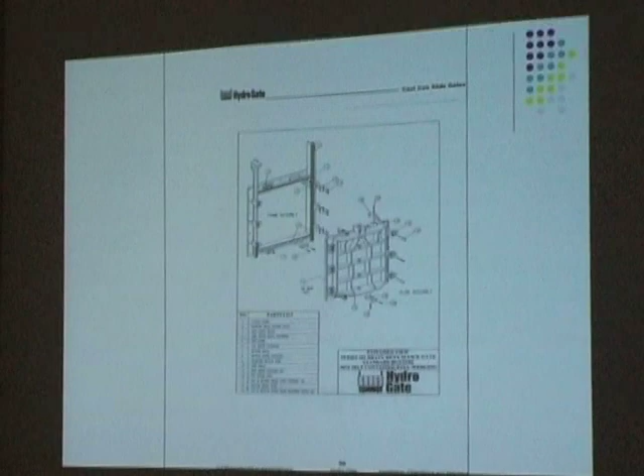There's a little parts list here. This isn't specific to a particular unit, it's more of the lingo and terminology covering what each part is. This is more for the Whipps and stuff.

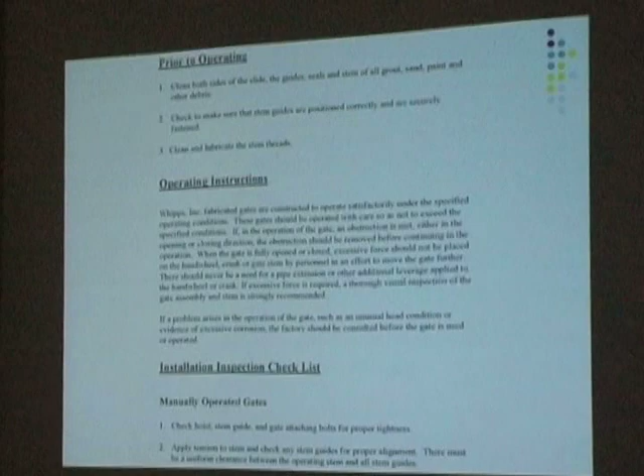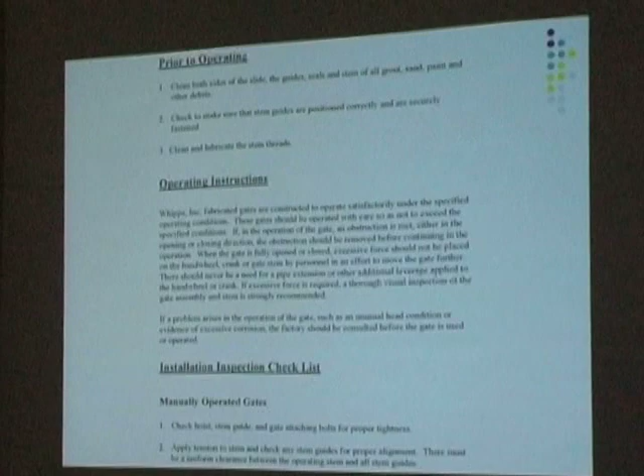What I've said truly applies to Whipps and slide gates as well. There's no real difference in the operation. It has a stop collar, it has a hoist, same as the others.

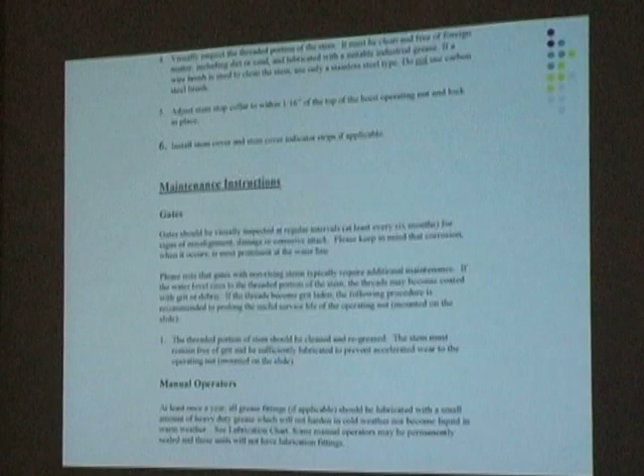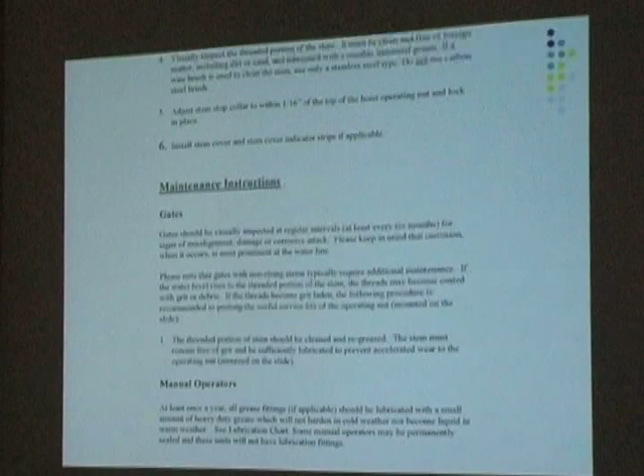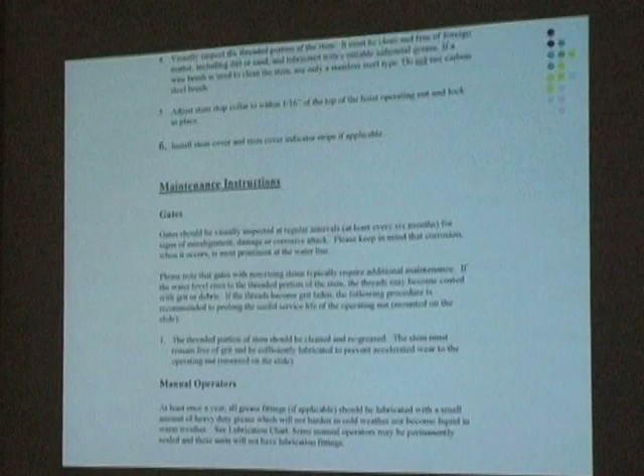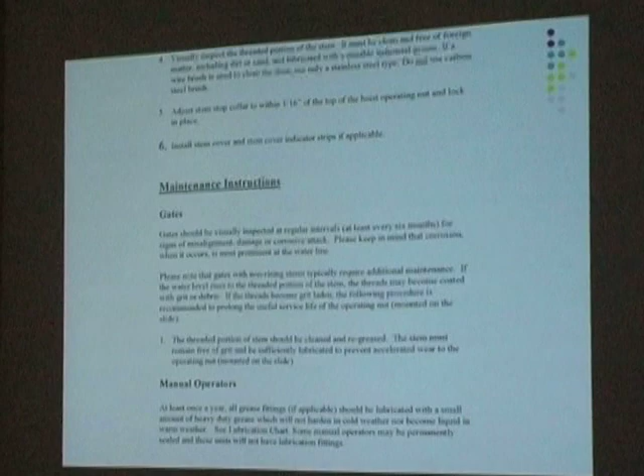You need to set the stop collar properly and grease the stem. One of the most common reasons a fabricated slide gate will leak excessively is when the contractor gets grout on the plastic seats, which damages them so they won't seal. We always say please clean it properly, because most fabricated gates are mounted on a pad of grout, so it's more common to get grout on that than on a cast iron gate, which goes on a wall. That's something we need to be aware of, and I'll check that out.

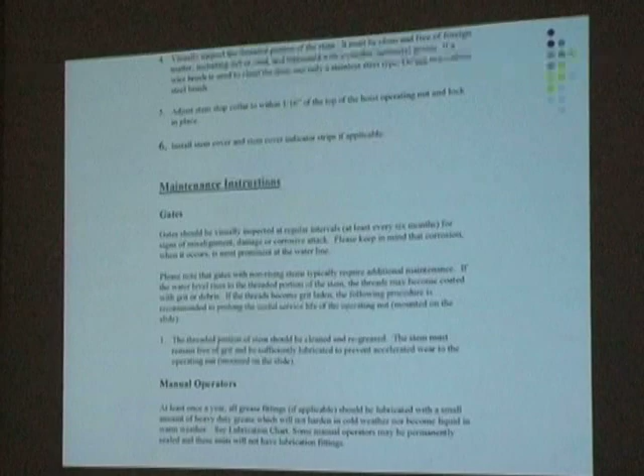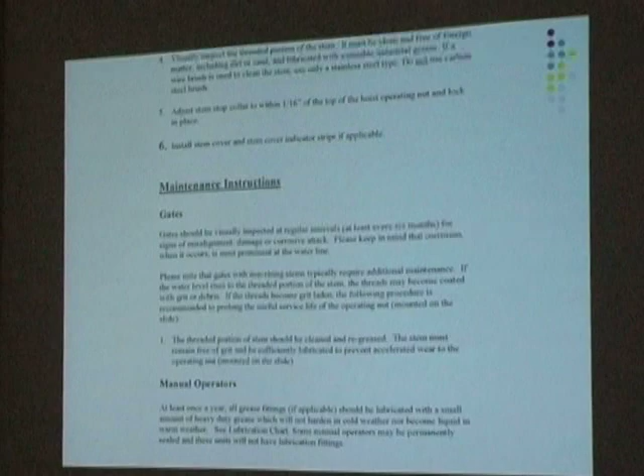Manual operators have a little grease fitting. They recommend greasing once a year. Don't overdo it - don't keep pumping the grease gun until you blow the rubber O-ring seal out of the bottom. Just a few pumps will be sufficient.

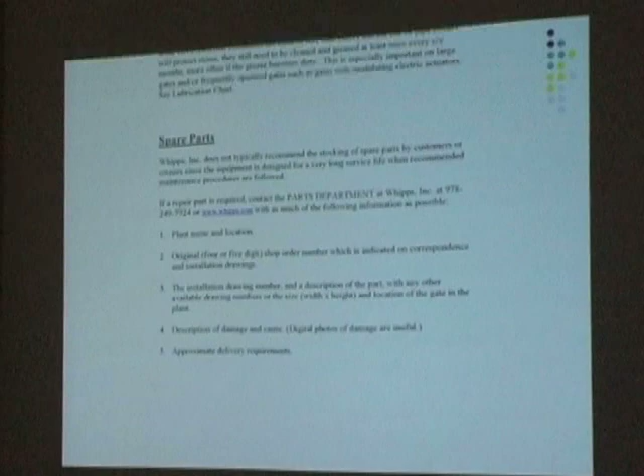Same thing with these - really no spare parts needed. Now, I don't know how you folks are set up - do you have different people who work on the electric operators versus the maintenance people or electricians?

For the electric operators, we're going to set the limit switch and the torque switch. On the EIM actuators you have here, they're all mechanical torque switches and mechanical limit switches. Once we set it, they shouldn't change, unless the stem has been replaced. But if things stay as they are today, you don't need to change the limit switch. Maybe the torque switch might need some fine adjustment, but not the limit switches. Limit switches are positioned mechanically, and even electronic ones like Limitorque setups shouldn't really need changing. But EIM here will be mechanical and should be set.

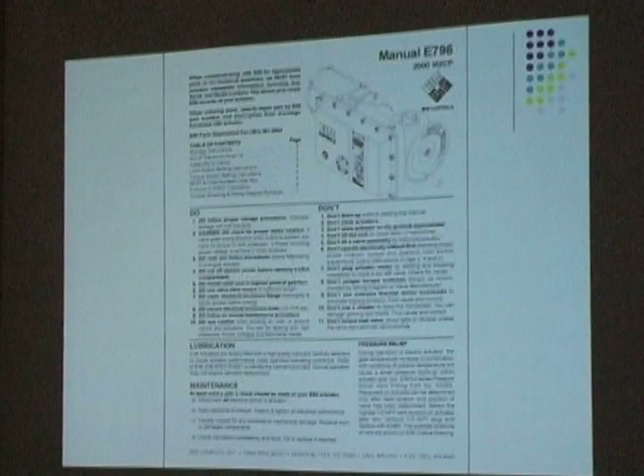When we go out there, I can show you what to do if you like - again, if you're not going to do anything with it. But it's very, very simple, similar to a garage door opener. It has a setting screw, right here. In order to set the limits, you need to push this down and lock it before you can turn these screws. If it's not locked down, these won't move. It also has a rotation direction you need to turn to set the limits. We're going to do it, and you shouldn't really need to do it once we leave.

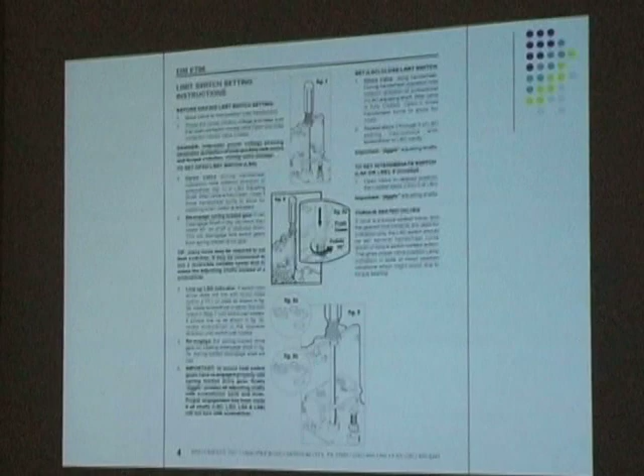Again, this isn't in your O&M. This is the torque switch I mentioned might need a little fine adjustment - just bear this in mind. The higher you turn these torques, the more susceptible the stem is to damage. Meaning if there's an obstruction and you've set that torque switch way high, the operator is capable of putting out more torque, so it's more susceptible to damage. That's why we usually set these torque switches just enough to operate the gate, nothing more.

This reduces the damage, because with an electric operator, unlike manuals, if there's an obstruction, the gate's going to come down and try to push through whatever the obstruction is, and the only protection there is your torque switch. It will put out a certain amount of torque - if it's not enough, it will stop. But if you set that too high, it's just going to keep pushing until it reaches that torque setting, and by then it might be too late. So it's imperative to set the torque switches properly, not too high.

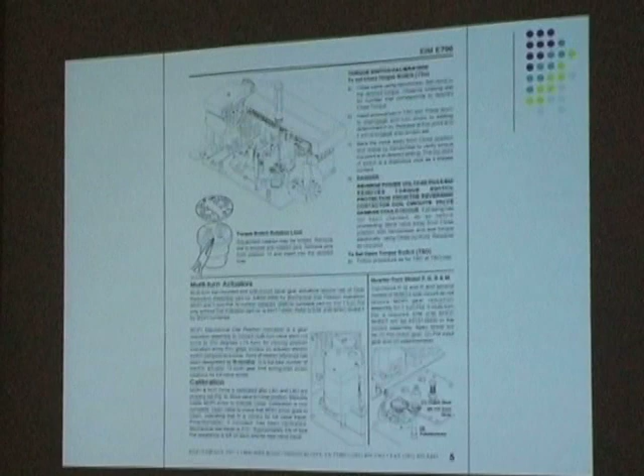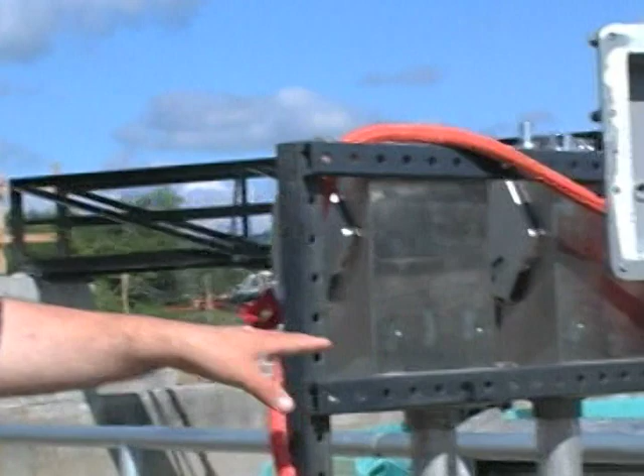There are many cases where I've gone out and turned that up a little bit because it wasn't sufficient, especially on a cast iron sluice gate. One of your cast iron slide gates, or sluice gates if you like to call it that, is the self-contained version - meaning the frame comes up, it has a yoke, a short pedestal, and EIM actuators.

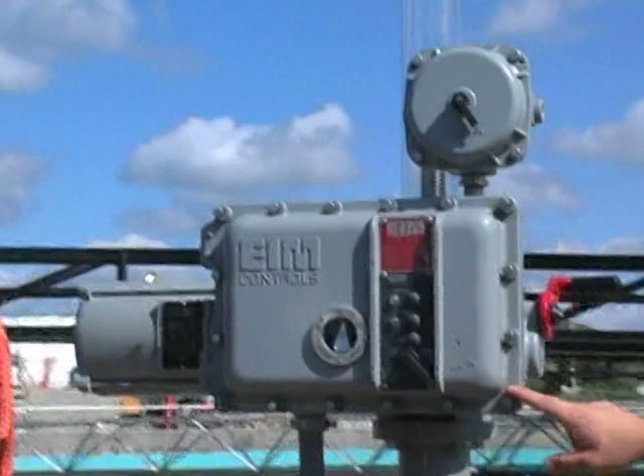The EIM actuator actually has its own disconnect. Not that every EIM comes with it, but it was an option that the owner chose to buy. And then there's a main disconnect here.

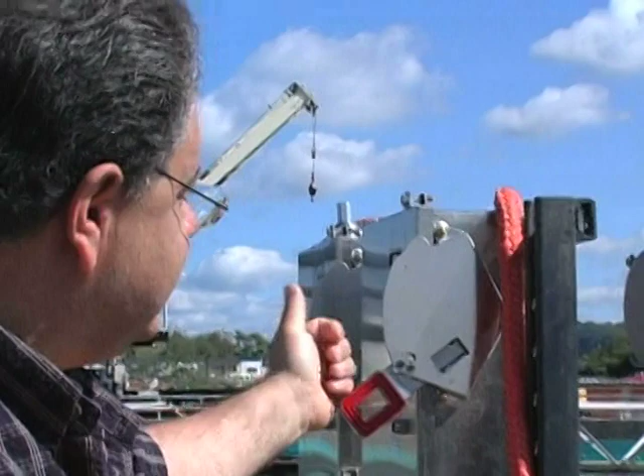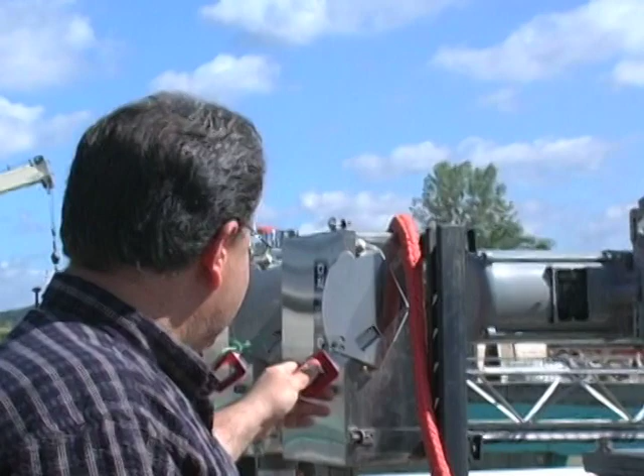Obviously you have a redundant system here. This is your main disconnect. So if you need to work on the gate, on the operator, make sure this is shut, lock out and tag out. The disconnect switch on that one can also take a small lock.

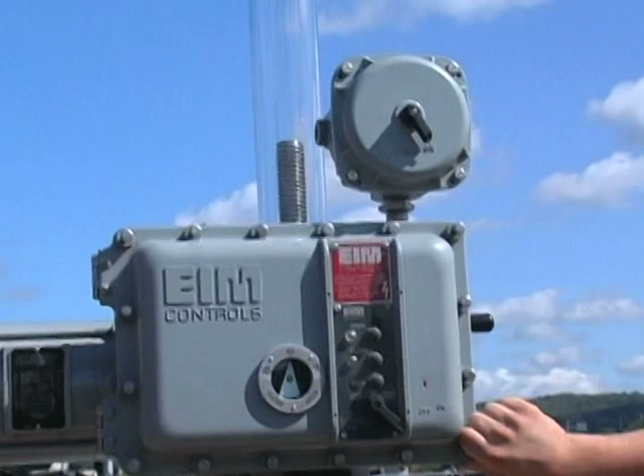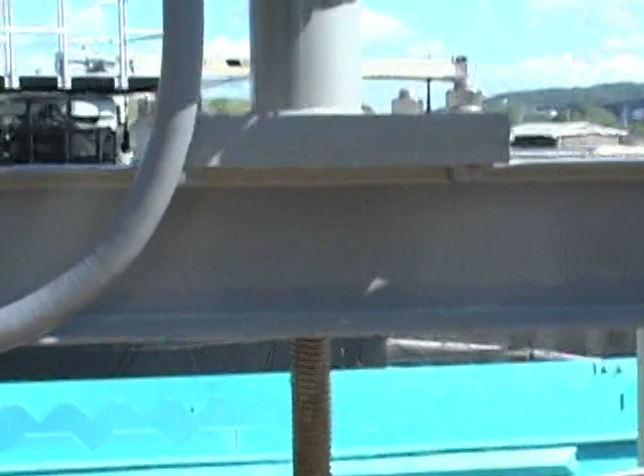Running through what we ran in the office: basically the control cabinet is right here, disconnect switch on top, the motor, and the gearbox is right behind it. The stem, as you can see, has grease on it, and the reason it looks like that is we haven't run it up and down yet. Once I run it up and down, that will be more uniform.

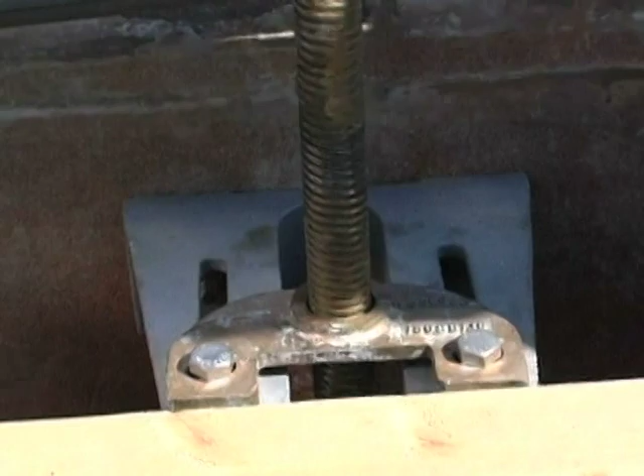Stem guides - the stem guide is there to support the stem. We try to limit the unsupported stem; that's where the buckling happens. The longer the stem, the more chance of buckling.

We have a mechanical dial position indicator. I will adjust that after the limit switches are set. You do that after positions are set.

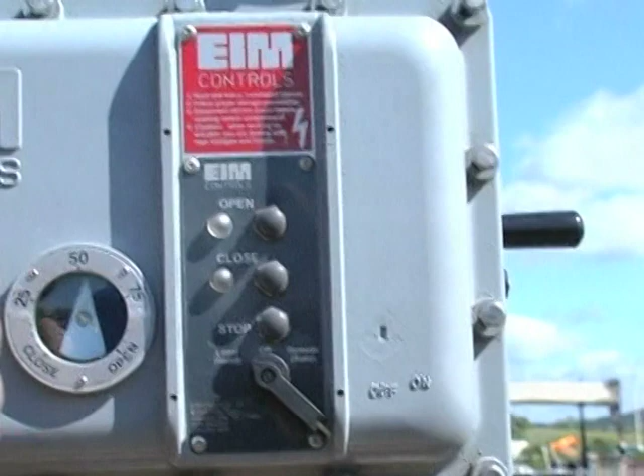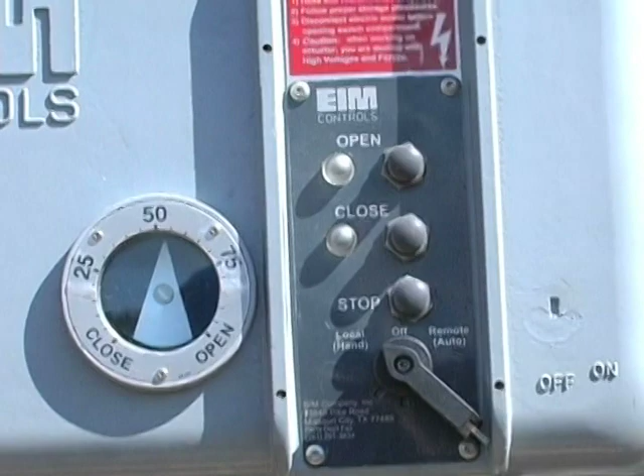You have open, close lights. If you have hit the open limit, that light goes on. If you have hit the close limit, this light goes on. And if you are halfway, both lights are on. You also have open, close, stop buttons.

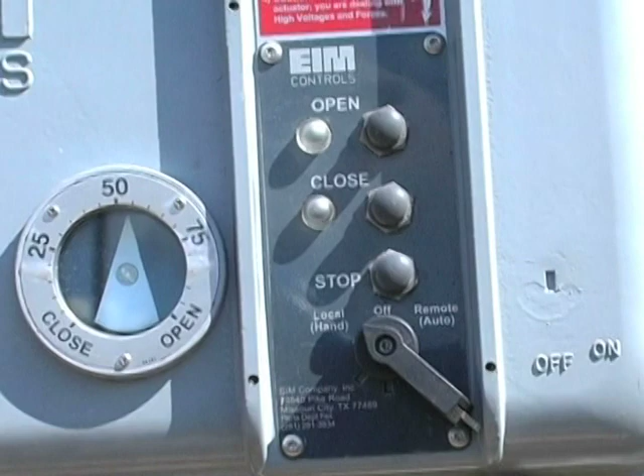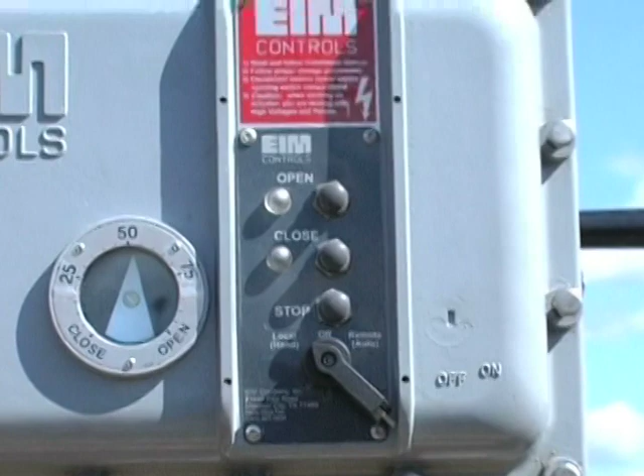You also have a selector switch here, and the selector switch has 3 positions. Local means you're operating from here. Remote means it's wired to your main control station. And of course off means nothing is going to happen. So if these are on, that's on, but that's in the off position - basically those buttons won't do anything.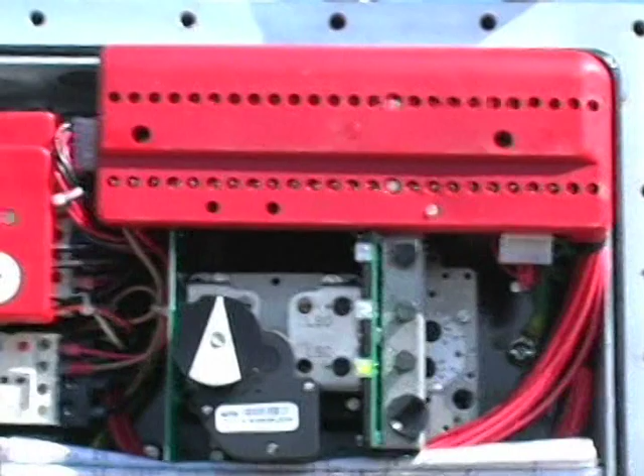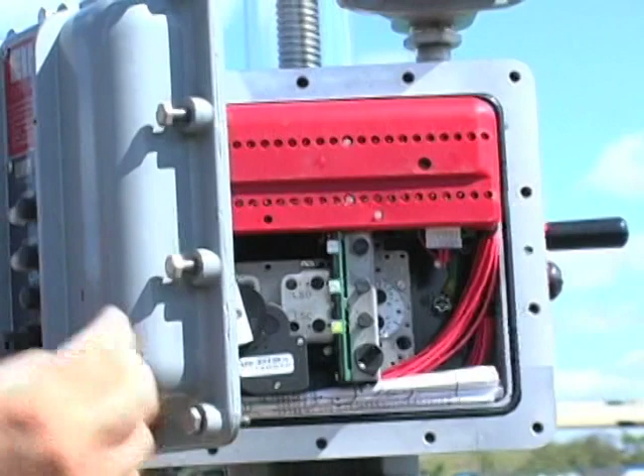If you ever open this to do any work, it's always a nice idea to put a light grease on that O-ring. It's got hundreds of bolts, so it's not easy to get in here.

The wiring diagram, practice good or bad, everyone leaves that in the operator. The electrician works on it and leaves it in there. So that's a common practice for the future - then you don't have to try to look for it and fumble around to find it.

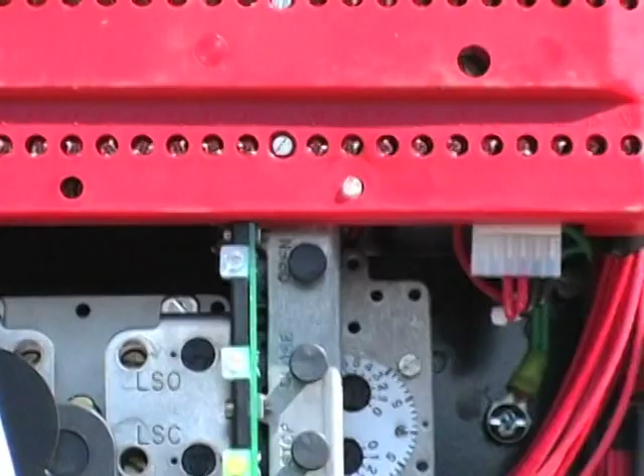There is a little light here, which you're only going to see when the door is open. If the gate is not closing and hasn't made its limit, and you notice you come out here and the gate is not going down, perhaps the first thing you need to check is that. If this torques out, you're going to see that little light turn red - that means it's torqued out. As long as the torque was set properly, you need to look for some kind of obstruction.

Going down here, what you see is your standard cast iron slide gate. The stem guide, stainless steel stem, goes to what we call the nut pocket. The nut pocket actually is not the one on top; it's right below that, and there's a brass nut in there.

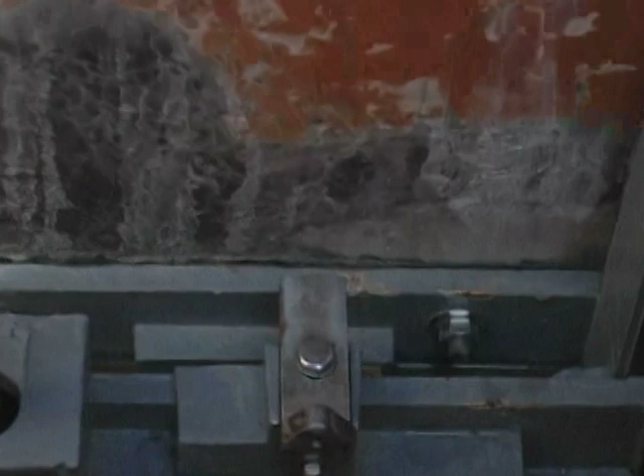Then you see the top wedges. The top wedges are hooks that, when it goes down, engage the hook in the back, and then the side wedges - you can see the inclined surface, and the further those wedges are tapped, the further the slide is going to be pushed to the seats. You can see the seat right there, and then there's a companion seat on the slide, and that's where your water tightness comes from.

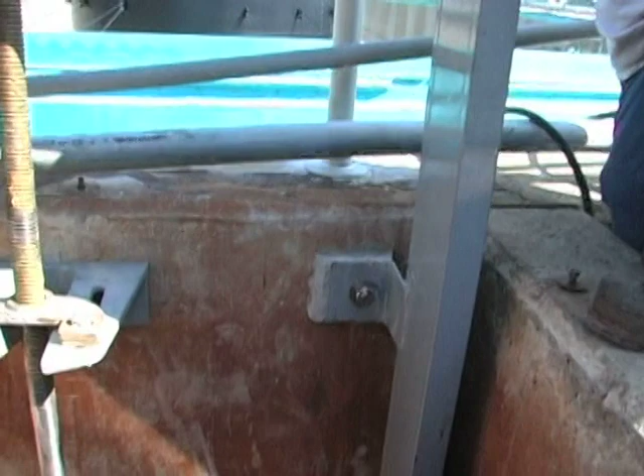This assembly is actually known as a yoke - for the cast iron gates, this is the yoke. If this was a floor stand, you wouldn't see this at all. The stem would just come here; there would be a wall bracket or a slab, and the pedestal would sit here. So this is again known as a yoke.

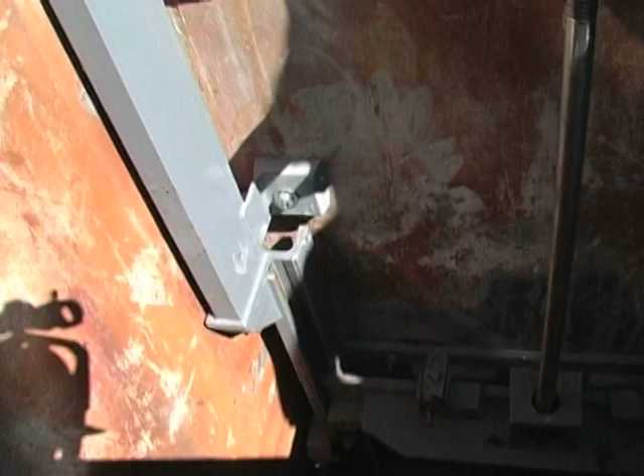This gate actually has what they call a tongue and groove liners. You can see, if you look inside the groove, there's a stainless steel piece that's screwed into the frame. Is that needed in an application like this? Probably not - it's good for modulating applications where there's frequent operation and that tongue can actually get worn down.

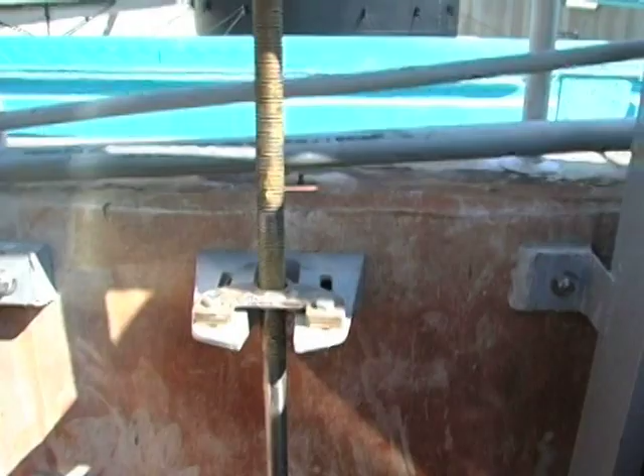With that, I think maybe we'll try to see if we can operate this. So I'm going to put the disconnect on - that is on already. And if you can see, there's a light on. Now this light's going to be, right now since it's not set, all over the place, but I just want to show you. So if I push open... nothing happens. Let's see.

I'm not going to take it all the way down, because I want to set that limit before I start fooling around with it. Very easy - I can't do the open again because it's not set, but by just pushing open and close, you should be able to manipulate the gate. And if you let it all the way up, it's going to hit the limit and stop.

The stem cover, I think, looks a little too big for me. Maybe it's from another gate. This is a 24 inch by 24 inch gate, so when I marked it, actually it opens up to here. So we might have to find the right stem cover for it.

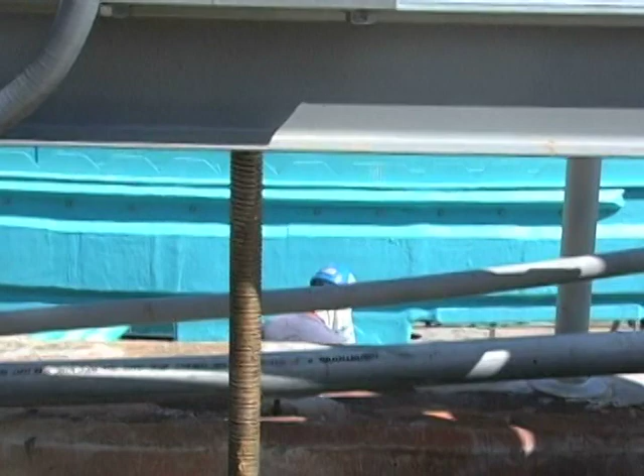The only maintenance here is going to be for you to keep an eye on the stem and the grease on the stem. This is most likely going to be open all the time, and the grease is not going to disappear on you - it's going to dry up. So to clean that up, get a rag, get some kind of degreaser, clean it, put fresh grease on it, run it up and down once, and leave it there. So the grease is the one you need to keep an eye on.

As far as your exercise schedule goes, everyone sets their own exercise schedule. We like to see every 3 months, more if it'd be even nicer.

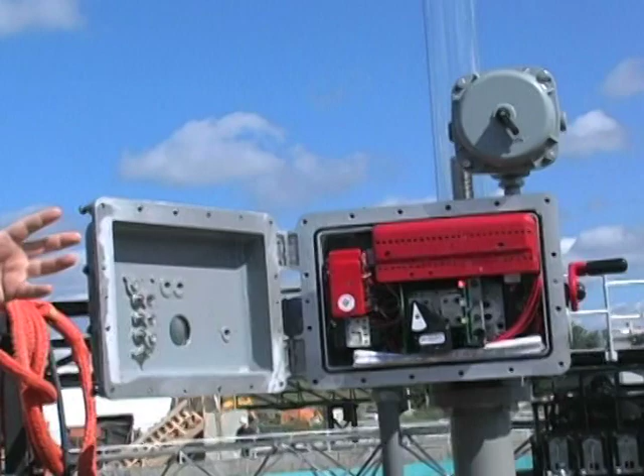If there's a wire to the station, you can do it from there. And when we say exercise, we don't mean to take this all the way down and up. What you want to do is, especially if it is closed, break that seat away. I'd be happy if the gate is in a closed position to just break it up 3-4 inches, open, and then close. Same thing if it is open - it's still good to exercise it because you get the gears moving and so forth. Just a few inches to get things moving.

Is the manual crank always engaged?

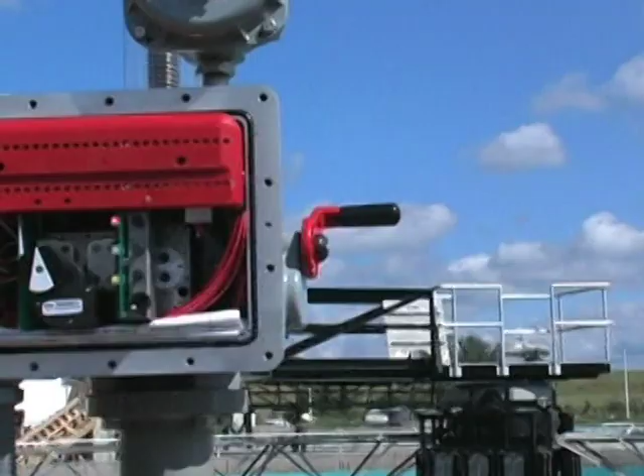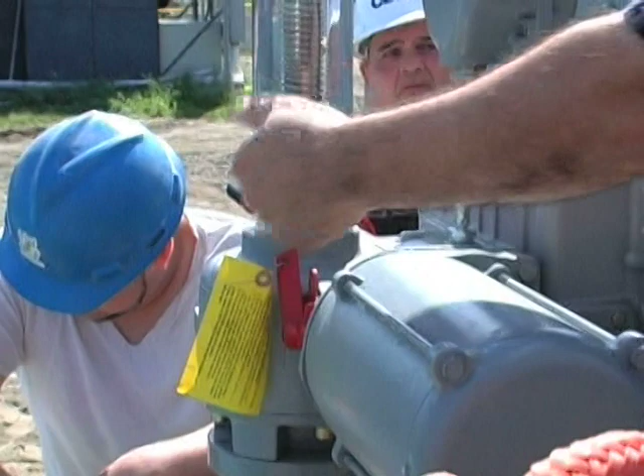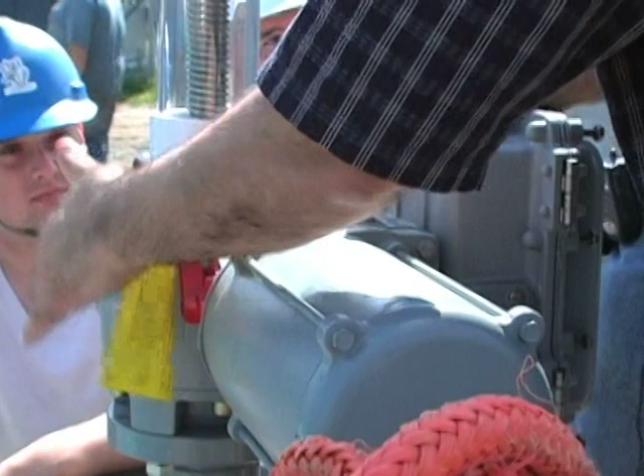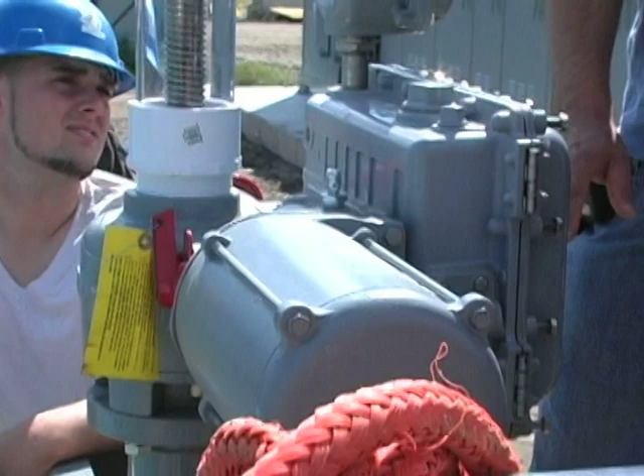Now, can you just walk up and flick it? No - let's say you had no power and you need to operate it. Come right over, you do it in manual, and it's operating manually. But when it goes to electric, it kicks out. You don't have to do it manually.

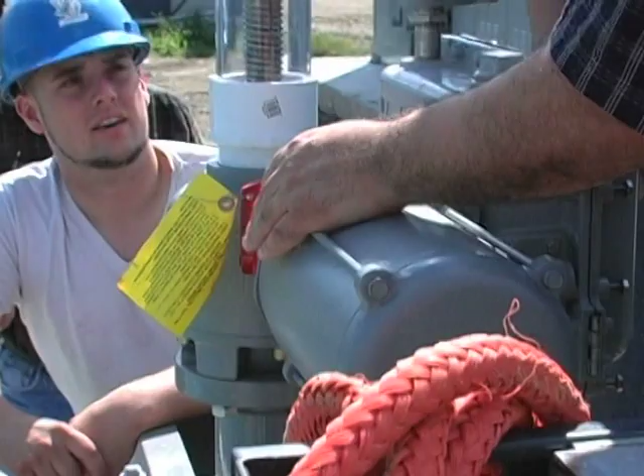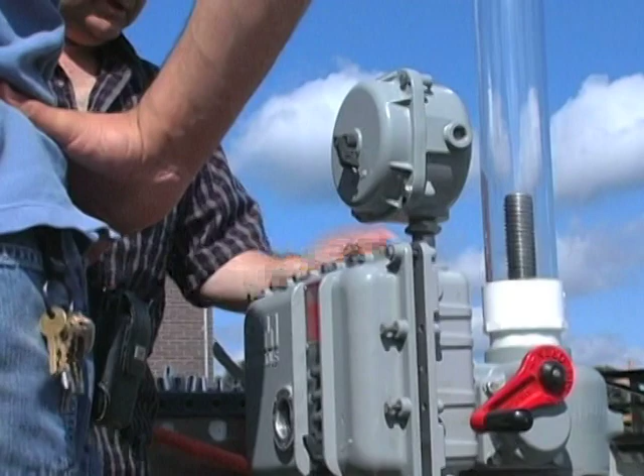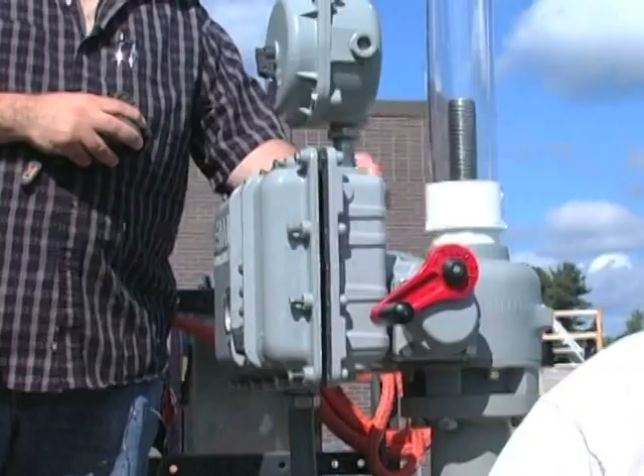There's a little vent here that actually comes loose with the operator. Then we ask the contractor to put it on. You might, in the future, see little grease around here - there's nothing really to be concerned about. What it is, they put this here because of expansion. What was happening before they had this, the grease, especially in New England with nights and days and all that, it was expanding and would pop a seal. Now the pressure just releases from here - it's a little pressure relief.

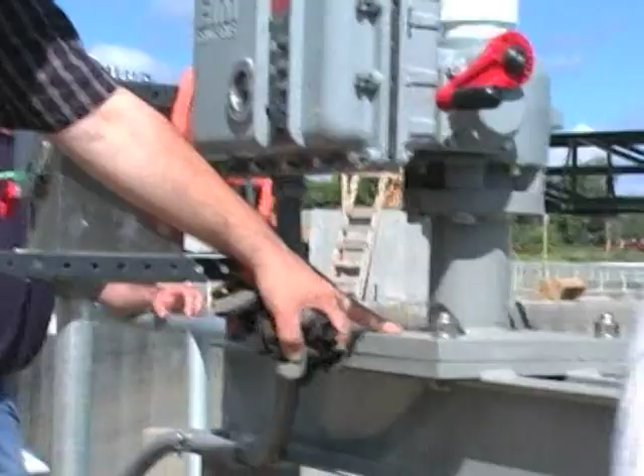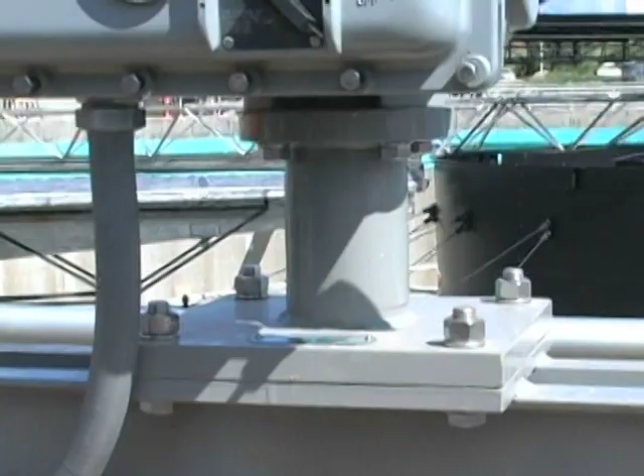What we talked about, I said the tag is here - that's a Hydrogate number. So if you need anything from us, there's a number there. That's what you will give us so we'll pull the file and so forth. And again, sales order numbers are all over the O&M as well.

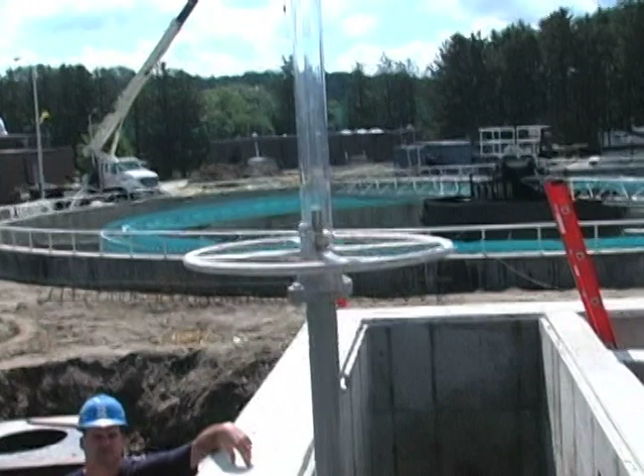What we have here is a cast iron gate. It is a non-self-contained gate - we've got a pedestal and a wall bracket, hand wheel operator, 2 stem guides, and then the gate down there. The gate itself is the same as others, with the exception of size difference, and it is manually operated. There's an arrow right on the hand wheel for operation, and a stem cover. In fact, I think this stem cover goes with the other one - this stem cover goes with the other one. Yeah, and the other one, this is a much bigger gate.

Here what we have is Whips aluminum rear gate. The difference between a rear gate and a regular gate is a downward opening gate - so when you open this gate, actually the gate...